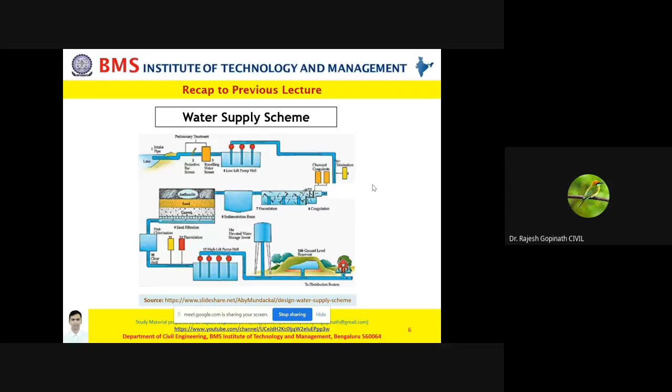The presentation today will be dealt with in the following manner. First, I'll let you know about certain basic terms used in the concept of sewerage engineering. Then I'll explain the need for having a sewerage system and the basic characteristics of sanitary sewage, and the different systems when it comes to sewerage - conservancy, water carriage, and so forth. Finally, towards the end of this presentation, I'll summarize and list the references for your kind perusal.

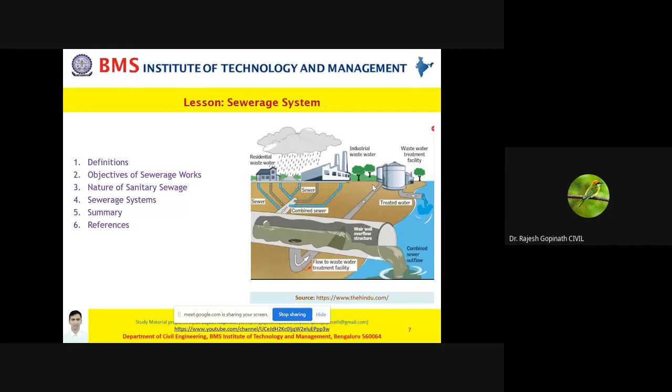If you remember, when we spoke about the water supply scheme in the first class, we spoke about different types of water - fresh water, brackish water, potable water, palatable water, pure water. Now, in the same context, in sanitary engineering, we have sullage and sewage, grey water and black water. In simple words, any wastewater coming out of a household from any source except the lavatories, toilets, kitchen and dishwashers, is called sullage or grey water.

Any other wastewater generated from a household, basically from lavatories, toilets, dishwasher and kitchen, is called sewage or black water. The pipelines or conduits used to transport this wastewater are called sewers. This entire system, which encompasses the sewage, the sewer, and the sewer appurtenances, is called sewerage.

Now, not just wastewater, there are other types of waste generated from a household, such as solid waste. Garbage basically refers to any combustible and non-combustible solid waste generated. Night soil is another term used for human excreta. Storm water, in other words, is the precipitation or rainwater.

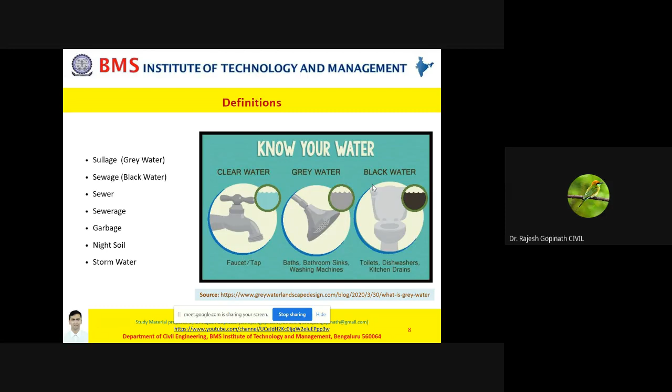Now, why should you provide sewerage? What is the need for transporting sewage in a safe manner? In simple words, the prime objective is to make sure there is no unethical, improper disposal of sewage anywhere on the environment - be it land, fresh water, or marine environment. Because improper disposal of night soil or sewage leads to complications such as epidemics, waterborne diseases, a nuisance of insects such as houseflies and mosquitoes, bad odor emanating from the neighborhood, and most importantly, it will not be aesthetic.

Now, having sewerage works gives you clarity on what needs to be provided in an unsewered area. Let's say you're talking about a small town or village where you cannot have sewer lines - then you need to provide septic tanks.

Now, the disposal of treated sewage is not just into fresh water, not only into the river or ocean, but it can also be disposed onto the land with dual objectives - either for farming or for disposal. So further in your course, we shall discuss that under the ambit of sewage farming and effluent irrigation.

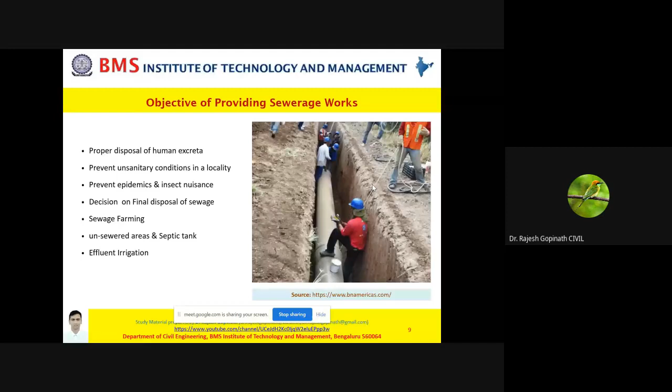Now, typically, what is the nature of your sanitary sewage? Please remember, the reason why I'm stressing the word sanitary sewage is because sewage can also be industrial. The wastewater coming from your residential area is sanitary. The wastewater coming from your industries is industrial sewage. Definitely, the sewage coming from industry will have components of sanitary aspects as well, because in any industry there are people, there are human beings.

In a similar manner, your sanitary sewage coming from households and municipalities, residential areas, may also have traces of toxic materials - let's say from a laboratory, or release of oil and grease coming from certain establishments where automobiles are repaired. But mostly and specifically speaking, your sanitary sewage is basically a dilute mixture of the wastewater coming from different sources from a household. Now, what are these sources?

As explained to you before, it can be your kitchen, your washrooms, your dishwashers. Now, typically speaking, fresh sanitary sewage is grayish in color, but as conditions progress, they become septic and turn black in color.

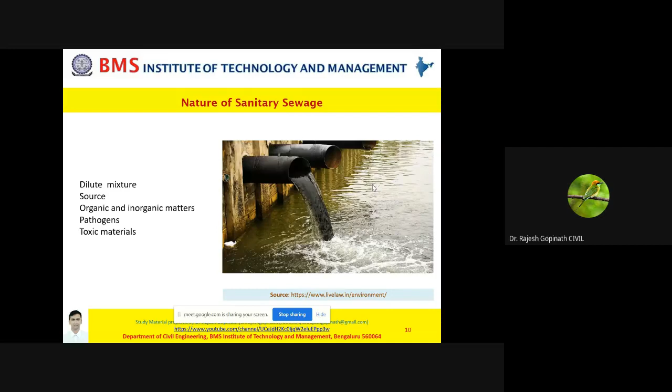Now, when it comes to systems of sewerage, there are two basic techniques: one is your conservancy system, and the other is your water carriage system. I will show you a simple animation, about 8 minutes long, which will give you a brief idea of what I am going to delve into further. So please look at the video.

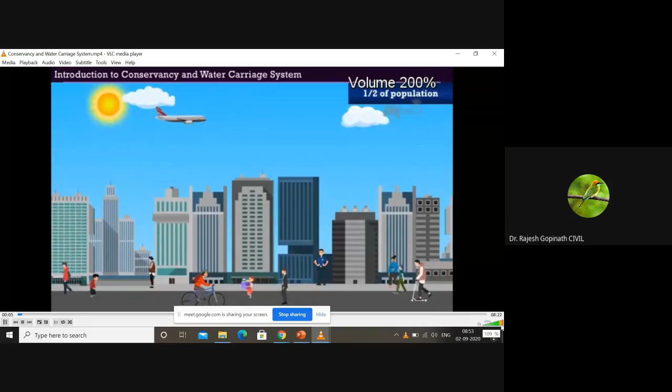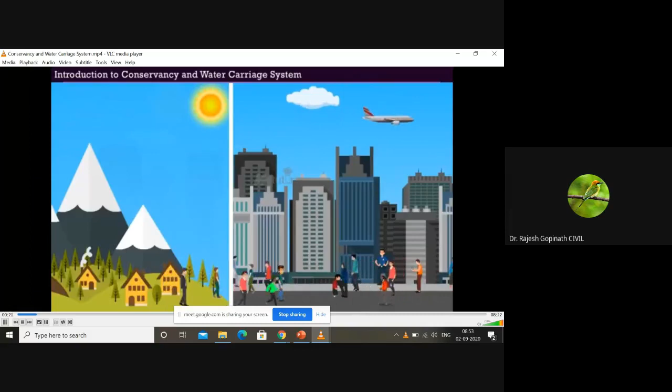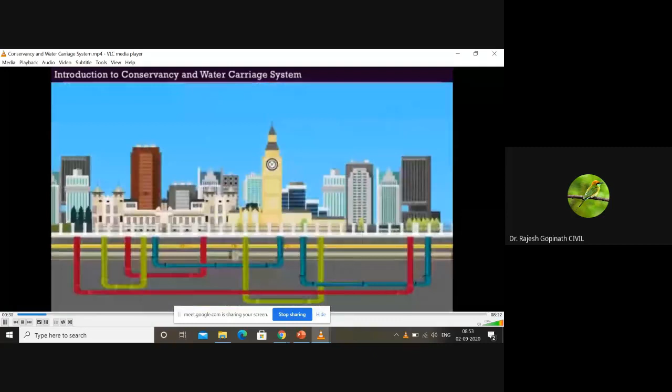Cities are one of mankind's greatest developments. Half the people on the planet now live in cities, that is, in urban areas, and it is expected to grow to two-thirds by the year 2050. This shows that people are driven to the higher living standards and social amenities that cities provide. But this results in the need for a better and well-planned habitation system to accommodate the overpopulation, especially the need for a good waste disposal system, because an increase in population invariably means an increase in waste too.

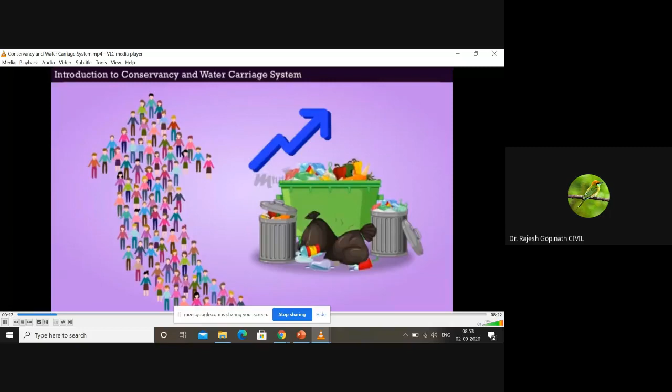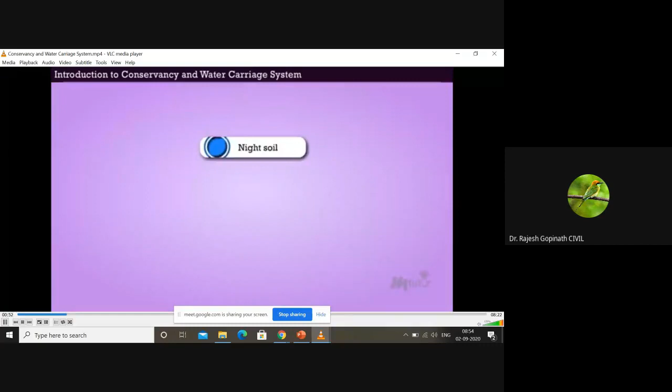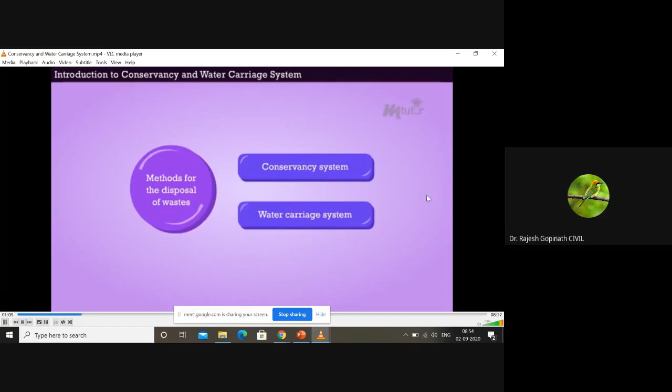Especially in households, there are many possibilities for various wastes to be generated. Some of the wastes generated in a household are night soil, garbage, sullage, and stormwater. There are two methods employed for the disposal of waste: conservancy and water carriage systems. So, in this lesson, let us learn about these systems in detail.

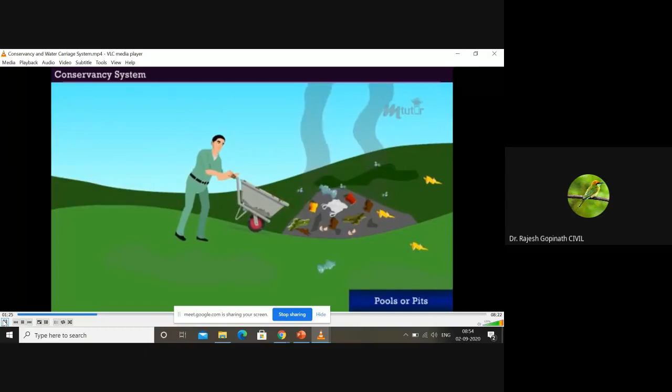Conservancy system. I want all of you to observe this animation carefully; I'll be explaining the same thing once again after the video is over. This is an old system in which various types of wastes, such as night soil, garbage, etc., are collected separately in vessels or deposited in pools or pits and then removed periodically, at least once in 24 hours. The system is also known as the dry system.

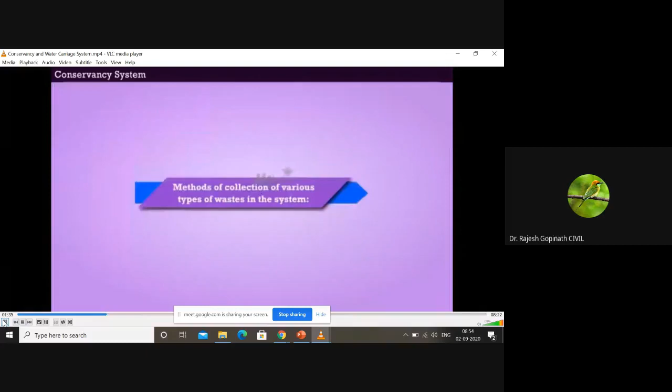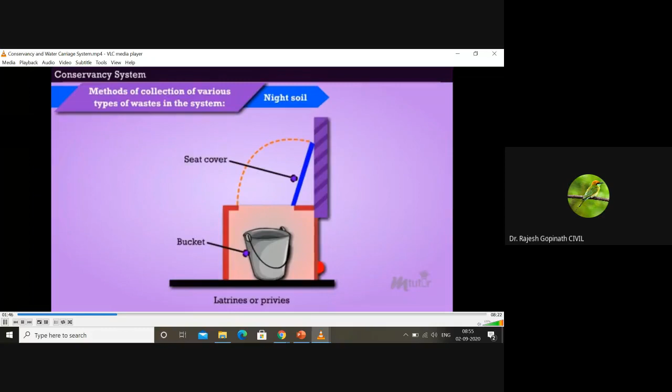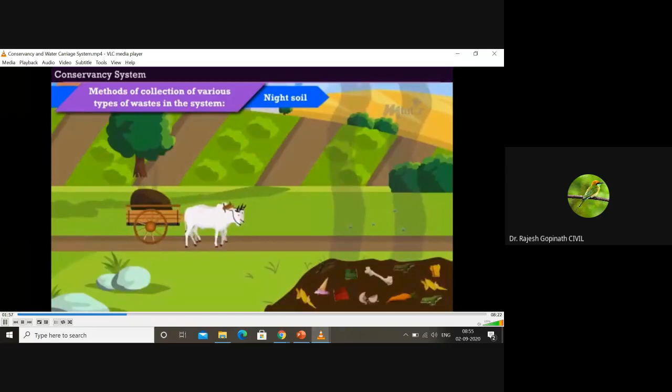Now let's see the methods of collection of various types of wastes in the system. First, night soil. Night soil, or human excreta in latrines or privies, is collected separately in pans or pails and carried on the heads of sweepers to a central place, from where it is transported in bullock carts or motor vans to a place away from the town for its final disposal.

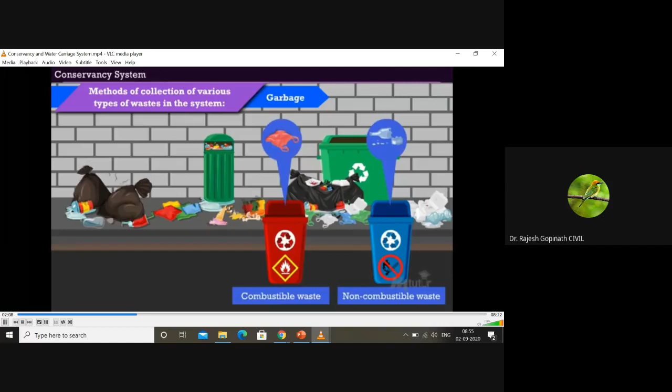Second, garbage. Garbage is waste matter of both non-combustible and combustible types, and it is collected separately in dustbins and conveyed on hand carts or garbage vans once or twice a day. Last, sullage and stormwater are collected and conveyed separately in closed or open gutters.

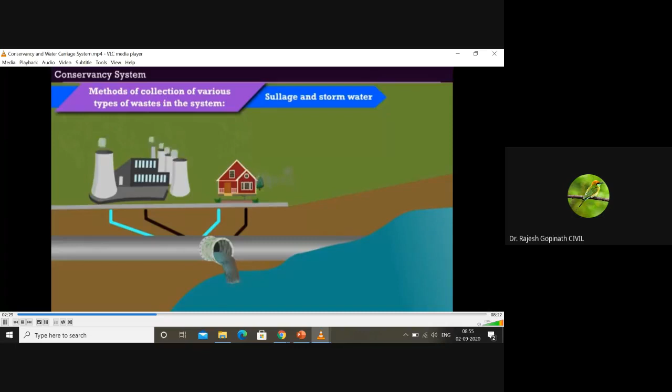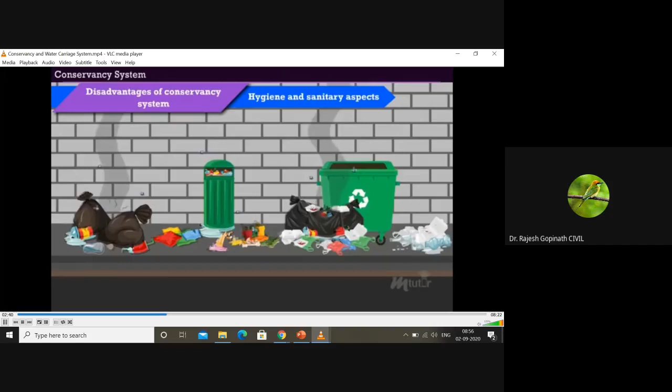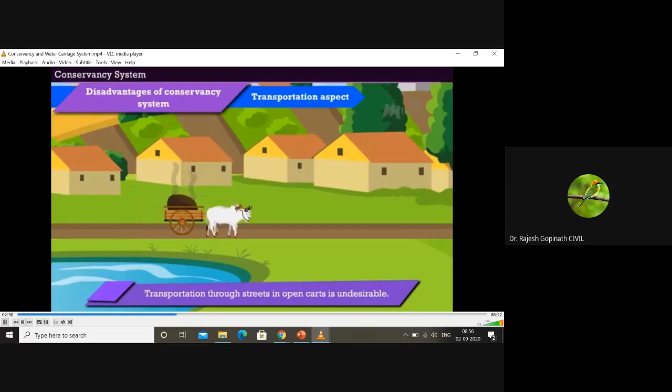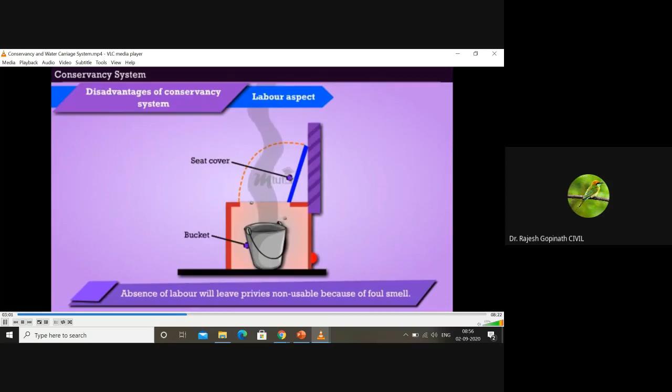Even though this system is economical, it is not recommendable due to various disadvantages, such as hygiene and sanitary aspects. The conservancy system is highly unhygienic and causes insanitary conditions. Transportation through streets in open carts is undesirable. As disposal is entirely dependent on labor, their absence will leave privies non-usable because of the foul smell. As for building design, these facilities are to be located outside the house, slightly away from the main building, so a compact design is not possible.

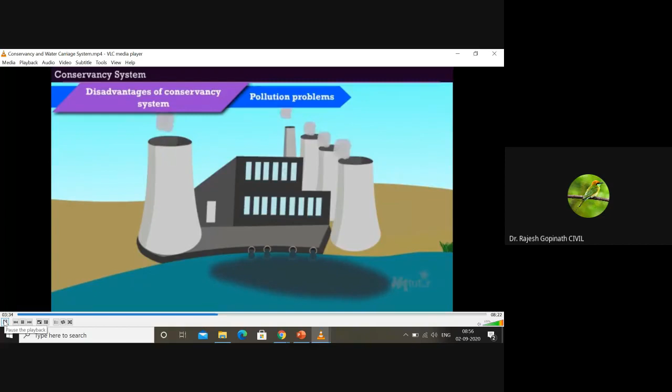Risk of epidemic: due to improper or careless disposal of night soil, there are more chances of an outbreak or epidemic. Pollution problems: the liquid wastes may soak into the ground, thus contaminating the soil and groundwater. So, because of these disadvantages, it is recommendable to go for the water carriage system.

In this system, the collection, conveyance, and disposal of various types of wastes are carried out with the help of water. Thus, water is used as the medium to convey the waste from its point of production to the point of its treatment or final disposal.

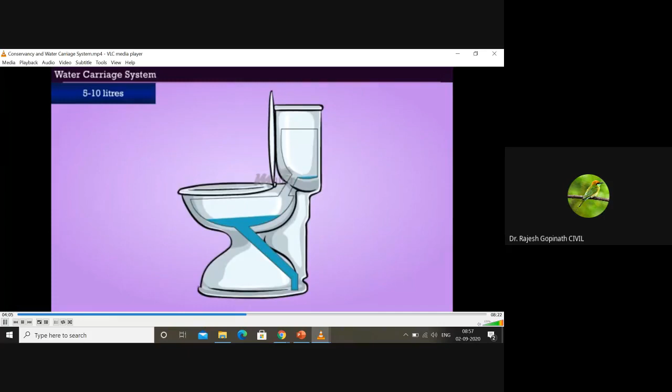In this system, specially designed water closets are used which are flushed with 5 to 10 liters of water after every use. The human excreta, kitchen, bath, wash basin wastes, etc., are led to suitably designed and maintained sewers. The sewers are underground closed pipes which lead the collected sewage to a suitable site where it is treated suitably and then disposed of by irrigation or by dilution.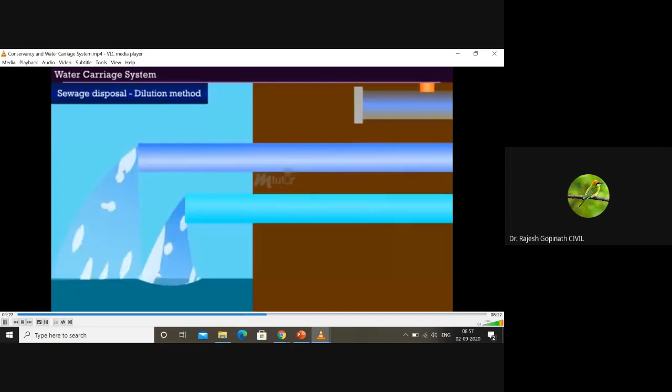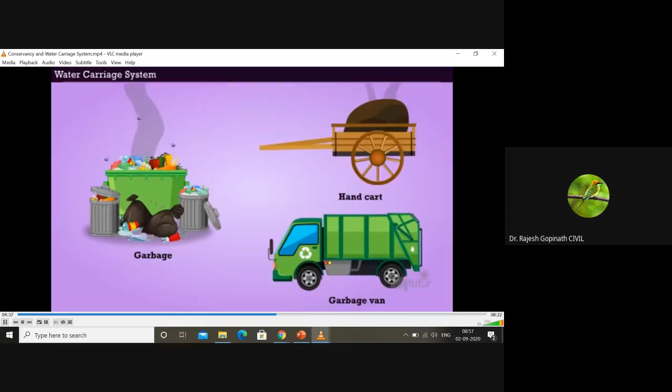It should be noted that garbage is collected separately and conveyed in the same manner as in the case of a conservancy system. Its major disadvantages are the large initial installation cost and the requirement of a large quantity of water. However, this is the most efficient and hygienic system.

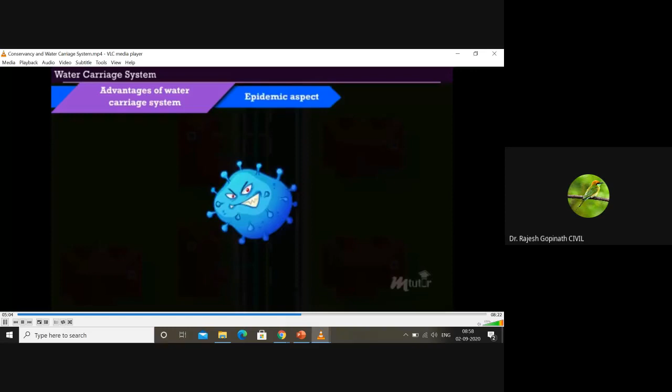So let's discuss the overwhelming advantages of this system. Hygiene and sanitary aspects: the system is very hygienic as the wastes are conveyed through closed conduits. Epidemic aspect: there are no chances of an outbreak or epidemic because flies and other insects do not have direct contact to the sewage.

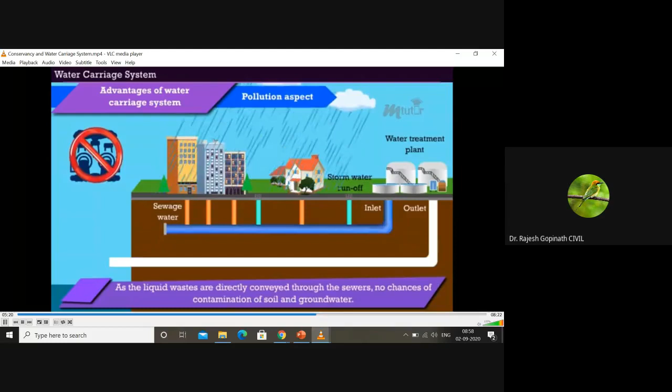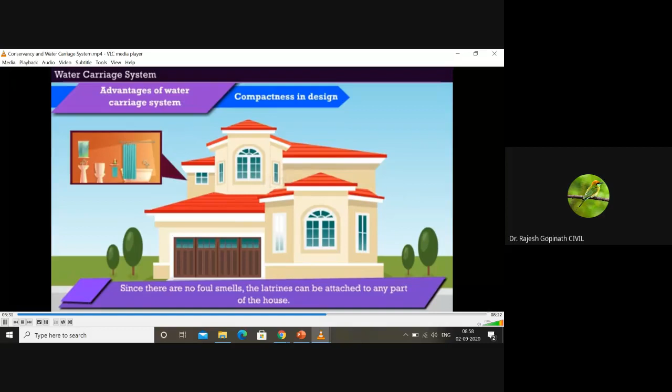Pollution aspect: as the liquid wastes are directly conveyed through the sewers, there are no chances of contamination of soil and groundwater. Compactness in design: since there are no foul smells from this system, the latrines can be attached to any part of the house.

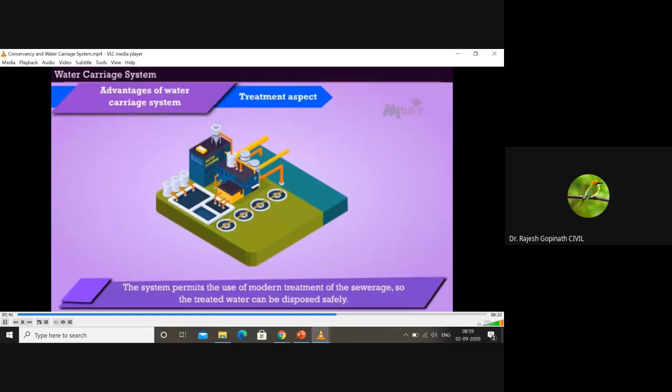Treatment aspect: the system permits the use of modern methods of treatment of the sewerage, so the treated water can be disposed safely. And the water carriage system is divided into 3 types: separate system, combined system, and partially separate system.

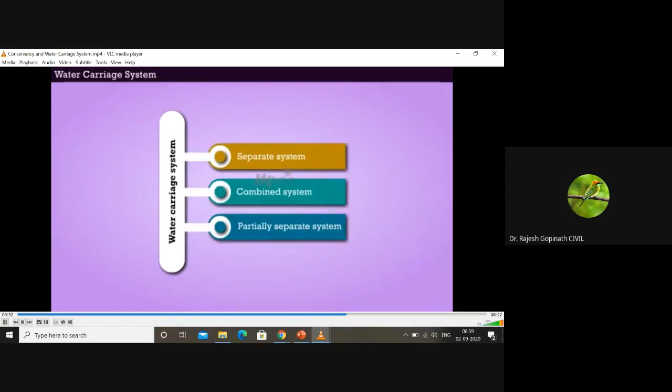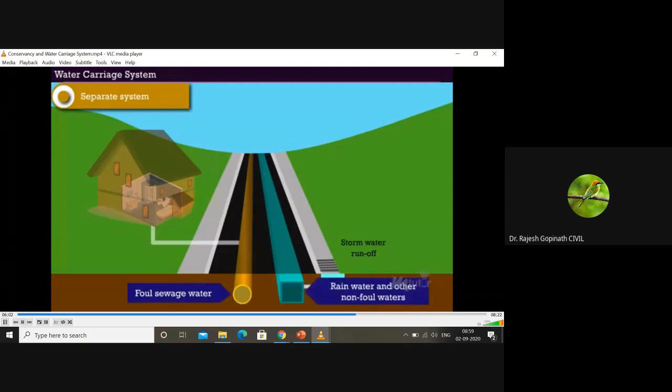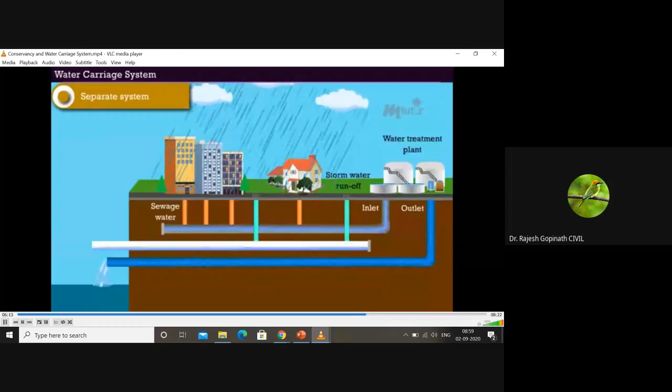In the separate system, there are 2 separate systems of sewers, one for the conveyance of foul sewage only, and the other for the rainwater and other non-foul waters. The sewage from the first system is treated and then discharged to the natural stream, while the sewage from the second system is directly discharged without any treatment.

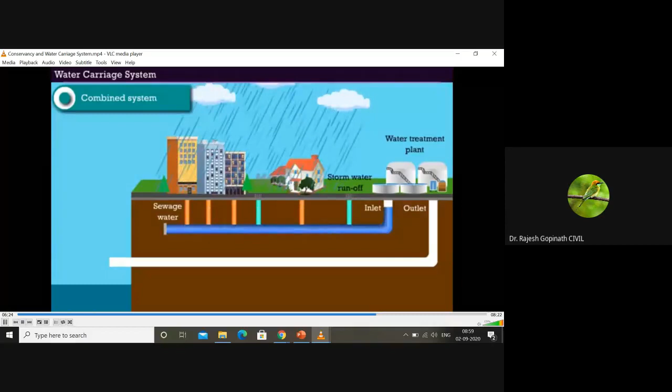Then the combined system provides only one sewer to carry both the foul sewage as well as the rainwater. Here, the sewage and stormwater are carried to the sewage treatment plant before its final disposal.

In the partially separate system, only one set of underground sewers is laid. These sewers admit the foul sewage as well as the early washings by rain. As soon as the quantity of stormwater exceeds a certain limit, it is collected and conveyed in open drains to the natural streams. The foul sewage, however, continues to flow in the sewers.

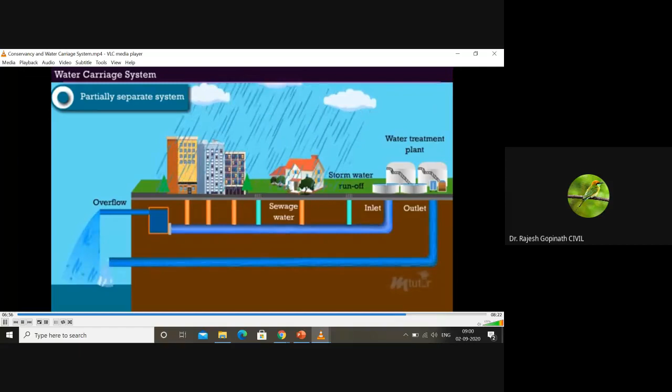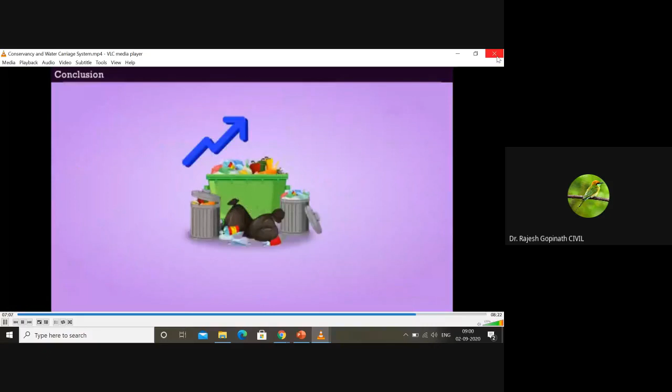Conclusion. This brings us to the end of the lesson. From this, we infer that due to growing urbanization, generation of wastes also increases, especially in households. So it is essential to provide a proper waste disposal system.

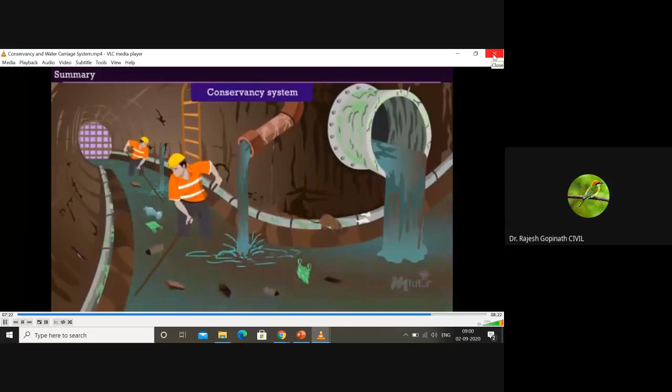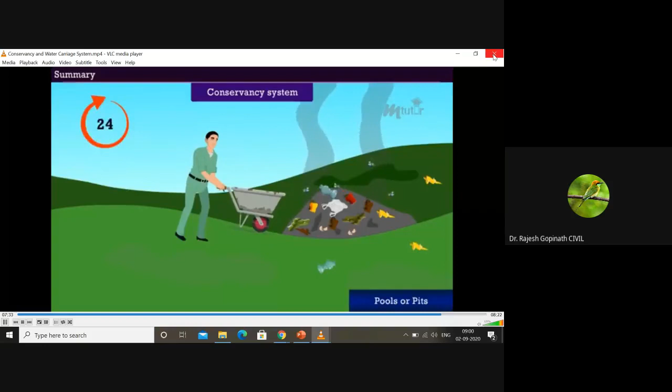Summary. In this lesson, we have learned about the Conservancy System. It is an old system in which various types of wastes are collected separately in vessels or deposited in pools or pits, and then removed periodically at least once in 24 hours. The various types of waste in the system are night soil, garbage, and sewage and stormwater.

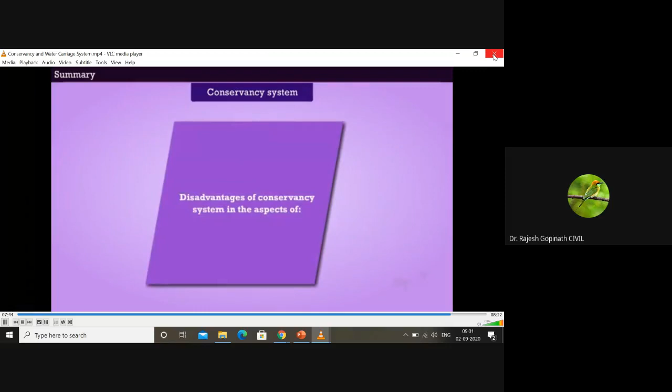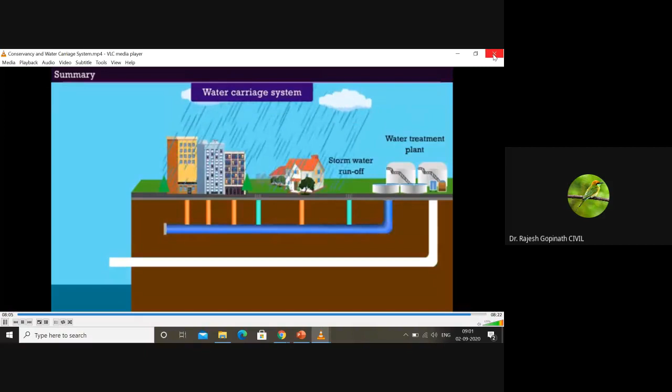Its disadvantages are in the aspects of hygiene and sanitary, transportation, labor, building design, risk of epidemic, and pollution problems. Then we learnt about the water carriage system. In this system, the collection, conveyance, and disposal of various types of wastes are carried out with the help of water. Its various advantages are in the aspects of hygiene and sanitary, epidemic, pollution, compactness in design, treatment, etc. And its types are separate system, combined system, and partially separate system.

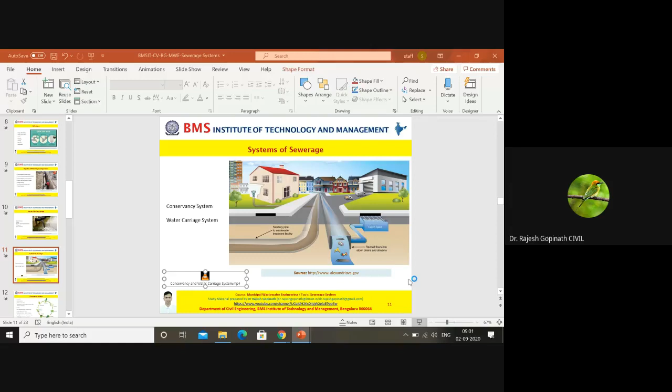So, my dear friends, that was a very good informative video which was taken from YouTube, which gave you very good information with respect to what a conservancy system and what a water carriage system is, with animation.

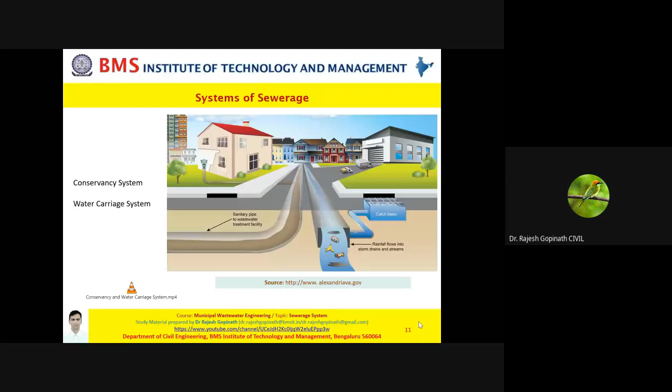Now let me recap and give you enhanced information. So, basically, a conservancy system is a dry system. It is actually outdated, it is not practiced anymore, but probably in small towns and villages this practice still continues.

So what happens in the system? The different kinds of waste, that is refuse, are separated, collected in a separate manner, conveyed in a separate manner, and disposed of in a separate manner. Now for instance, whatever is a combustible portion, that is burned, and whatever is a non-combustible portion, which cannot be biodegraded, is used for filling low-lying areas.

That is for further reclamation. And those which are biodegradable, they eventually get composted to become manure. And as discussed, as shown to you, even the night soil is transported separately and the wastewater is also disposed of separately. So what is the advantage that you're looking at?

In terms of initial cost, it is very less, and the quantity of sewage you're talking about is extremely low. But what are the demerits, what are the disadvantages of a conservancy system? You require more land, and there are high probable chances that your groundwater can get contaminated.

Obviously it is not pleasing in an aesthetic manner because you have foul smell and the nuisance of flies, and these can lead to epidemics. And please understand, the dependency on human labor is more in the conservancy system. In case these sweepers are on strike, or if they're not working even for a single day, it can lead to chaos.

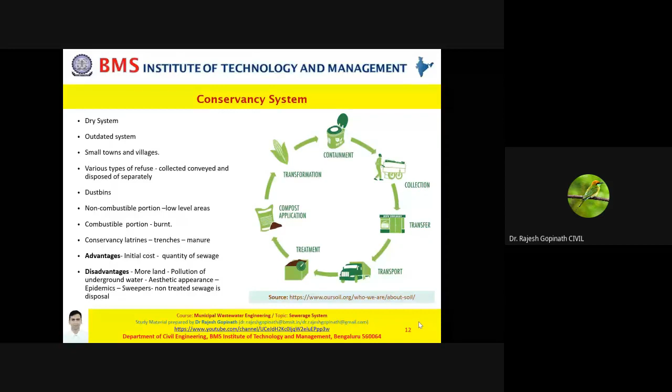So that was your conservancy system. This information can also be seen in the flow chart which is on the screen for you. Now let's move on to the second type, that is the water carriage system. So as the video said, there are three types: combined, separate, partially separate.

What is basically the information with respect to this system? In this, all the kind of waste, that is human excreta, night soil, the waste coming out from your washrooms, toilets, kitchens, dishwashers, all of these are being transported using water, which means a huge quantity of water is being consumed.

The advantage of the system is it is better and properly designed. The most important mandate is this wastewater which is generated and transported cannot go onto any natural environment unless it is properly treated. So unlike your conservancy system, wherein the waste just sits in an open area, here the wastewater cannot just remain in the system. It has to go to a treatment plant, a wastewater treatment plant, and after treatment it must be disposed into the natural environment.

Now please remember, if you look at the final characteristics, the wastewater, your sanitary sewage, is eventually 99.9% water itself, clean water. It's only 0.1% solid waste. So what is the advantage? You don't have any nuisance with respect to flies and mosquitoes, the land requirement is very less, and it is much more hygienic and improvised compared to conservancy.

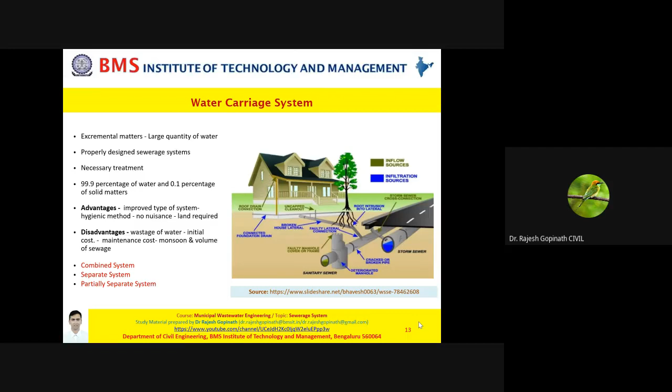Now let's look at a very simple video, an animation, to understand how to distinguish between combined system, separate system, and partially separate system.

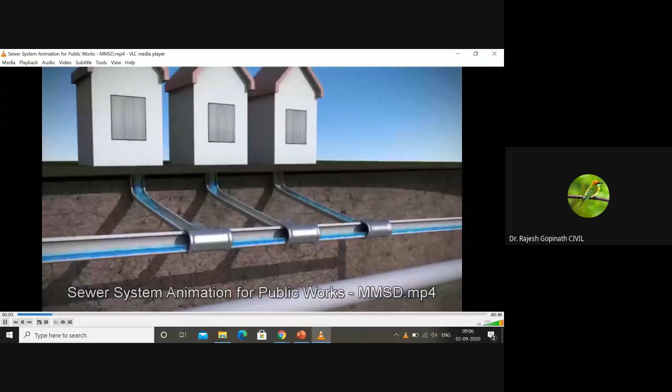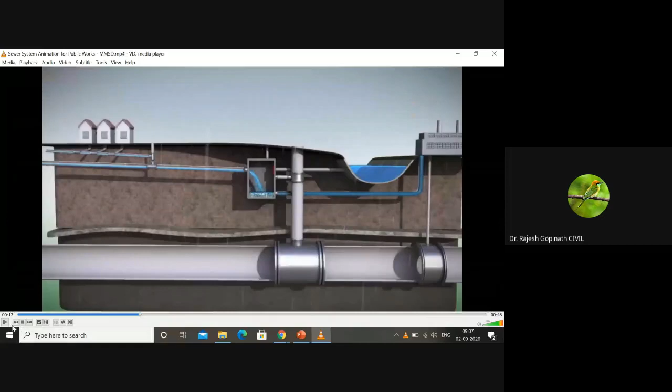Let me replay this for you. The first system that you're seeing now is basically the separate system. Have a look once again. The sewage coming from your household is being transported. This is the separate system. There are separate pipelines, sewer lines for this.

Now you're looking at the combined system. Basically what happens here is it's not just the sewage, also your storm runoff is entering into the system. So you have one single conduit which is collecting both of these.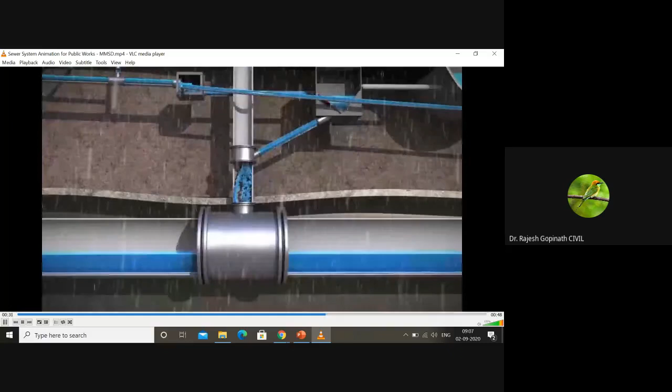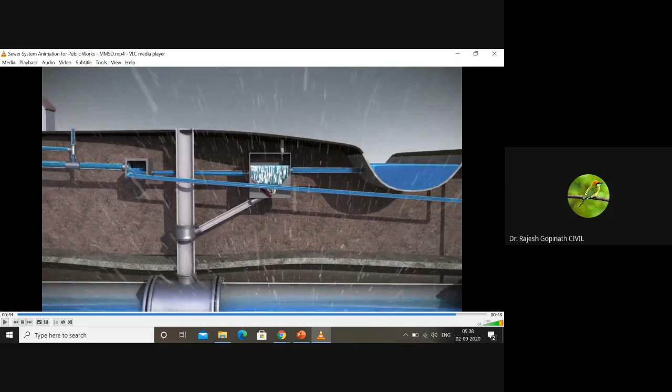I'll replay the second video. So let's recap. In the separate system, that is the first part of this video, you had only the sewage coming out, and that sewage was separately being transported to a treatment plant, and then it was being disposed into a natural environment. But the second part of this video was where both the sewage and the rainwater, that is storm runoff, were being collected together and then treated and disposed.

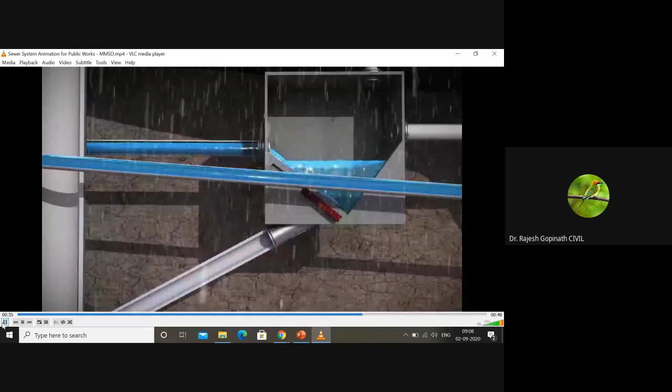Okay, let's have a look once again. I would request you to observe very carefully. So here you saw that the sewage was only being transported - this is your separate system. Now let's look at the second part. Here, along with the sewage, you have rainwater also entering the system.

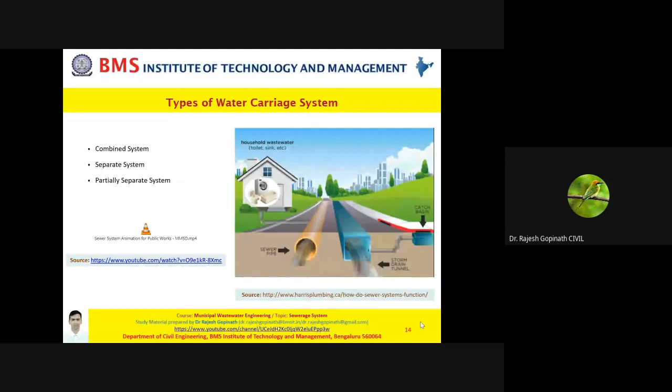Now let me try to explain this once again, the three different systems, in the further slides. Combined sewerage system: here there is only one single set of pipelines, conduits, or sewer lines. And this single sewer collects not just the sewage, but also your storm runoff. So what is the advantage? It's only a single pipeline, so there is less construction cost.

It's highly economical. Now since you have storm runoff entering, there is no question of siltation or choking. And since storm runoff, which is more in quantity, is entering into your pipeline, the dilution effect takes place, which means the toxicity is reduced. Especially in crowded areas where you cannot lay multiple pipelines, this is the best suitable system. And yes, self-cleaning velocity - since there is water entering along with the sewage, it enhances the self-cleansing velocity.

But what is the disadvantage of the system? Since you're talking only about one single pipeline, you need to make sure that the diameter is quite huge - the size of the sewers matters here, it will be much bigger than other systems. Now it is not just your sewage which is going to the treatment plant, it is sewage plus rainwater which is going to the treatment plant. This means you have a greater load going to the treatment plant.

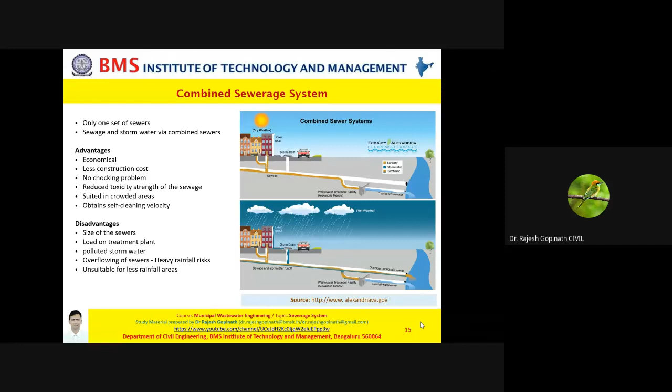Now let's look at the separate system. Here you have got different sets of sewer lines, different sets of conduits. One set of sewer lines will transport only the domestic sewage to the treatment plant, and after treatment it is disposed into the natural environment. The second set of pipeline, which could be an open or closed conduit, functions to collect the rainwater, which is also naturally disposed into the natural environment.

So what is the advantage? You're not polluting the storm runoff. Now the pipelines or sewer lines obviously require lesser diameter, since a lesser quantity of wastewater is reaching the treatment plant, obviously the load is lesser.

But what is the disadvantage? Since you have more number of pipelines or conduits or sewer lines, there is more construction cost. Obviously your installation cost and maintenance cost are very high. And since the sewer carries only sewage, there are more chances of silting and choking, and the self-cleaning velocity is not achieved. Especially in crowded areas, old cities, towns and villages, you cannot afford this because you need to dig up the roads and lay multiple pipelines. And in the event of any damage or crack, there are chances of mixing up of water and wastewater.

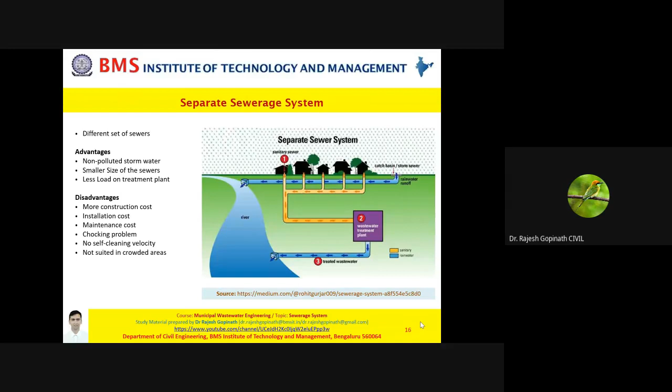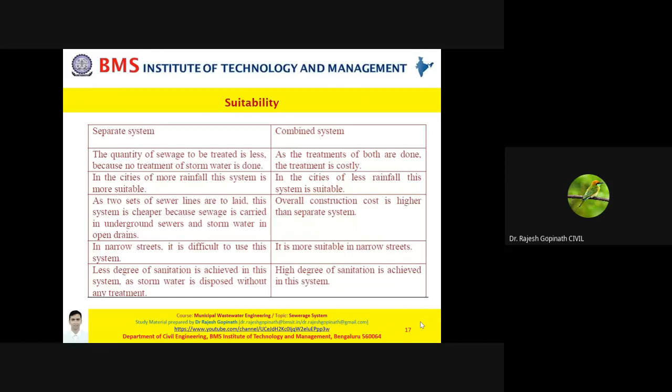Now this is a small, simple glimpse to compare a separate system and a combined system. This is what was conveyed to you in the animation and also in my interaction with you.

Partially separate sewerage system, also called partially combined sewerage system, is very similar to the previous two systems because it combines their advantages. In simple words, only a certain portion of your storm water is allowed to enter the sewers. It is not the entire rainwater which enters the sewers, only a small part of it. The objective of doing that is to achieve self-cleansing velocity, to achieve non-siltation and non-choking.

So the majority of the storm water is eventually transported in a separate open or closed conduit to the natural environment. Now let's look at the advantages. Compared with the previous systems, this is much more economical, and your sewer sizes are neither too huge nor too small. This is definitely an improvement over the separate system, overcoming all its disadvantages. The cost involved and the workmanship involved in plumbing is also reduced.

You don't need any flushing system here because you already have a small part of storm runoff entering. Since you have only a lesser quantity of storm runoff entering, you're not polluting the entire quantity of rainwater.

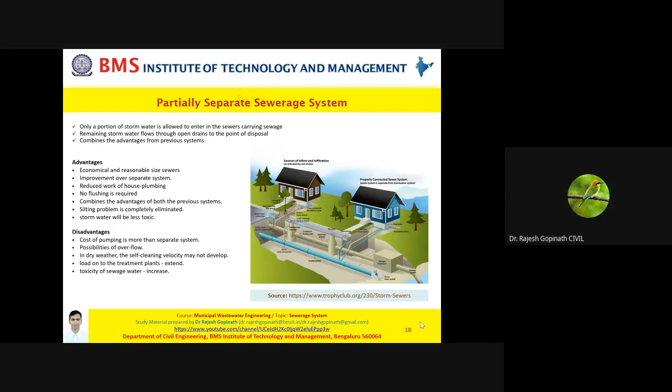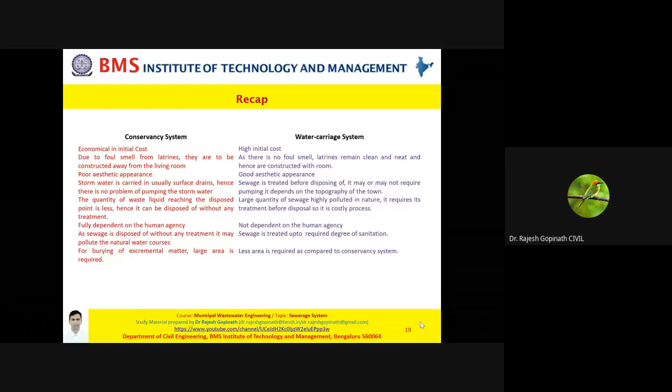Now, what did we discuss in this presentation? We spoke about how important the sewerage system is. We spoke about the merits and demerits of the conservancy system, which is a dry system, and the water carriage system, which was further of types such as combined, separate, and partially separate. We also discussed the favorable conditions that decide which system to go ahead with.